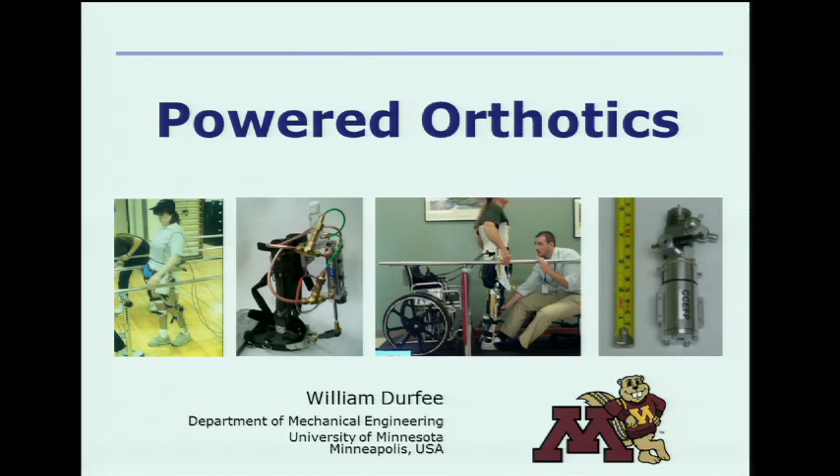Thanks, Ron, and thanks for inviting me. It's terrific to be back in Cleveland and to catch up with old friends and to meet new friends. It's been about 8 or 9 years since I've visited the facilities here in the Cleveland area, and it's always such a refreshing and invigorating opportunity for me to learn where you folks are at. So I always come out of these meetings here in Cleveland feeling newly refreshed. I'm looking forward to both showing you a little bit about some of the things I'm doing this morning and to meeting some of you later in the day.

The University of Minnesota is, I think Ron was telling me, compared to Case Western Reserve, there's something like 5,000 or 6,000 undergraduates there. That would be a small drop in the bucket for us. We're the fourth largest university in the country with a large number of students.

One of the interesting things about the University of Minnesota, which is terrific for designers like myself, is that we have so many disciplines, and so the possibilities of collaboration are really quite exciting.

Quite exciting there. We have kind of the sweet spot, like this place, where the engineering school and the medical schools are co-located, and as you know, that physical proximity is critical for substantive collaboration between fields.

And then the other part that is exciting about the Minnesota area is our MedTech industry, which is core to the state of Minnesota. So within the campus, within 50 miles of the campus, there are about 450 MedTech companies, including large ones like Medtronic, the largest MedTech company in the world, and small, tiny startups too. Our core areas are cardiovascular, and then our second core area is neuro, among the big and small companies. So it's a pretty exciting place to do MedTech.

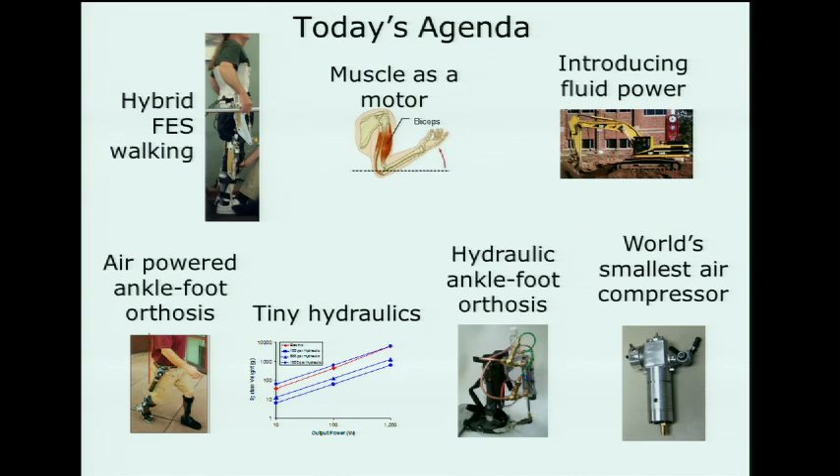So I'm going to talk today a little bit about hybrid FES walking, talk about muscles, and then spend predominantly time talking about fluid power. As we get there, I'll explain why I'm pretty excited about fluid power, including an air-powered AFO. I'll try to give you some background on fluid power on a human scale with tiny hydraulics, a bit on a hydraulic ankle-foot orthosis, and then some tiny power supplies. That's kind of where we're headed over the next 45 minutes or so.

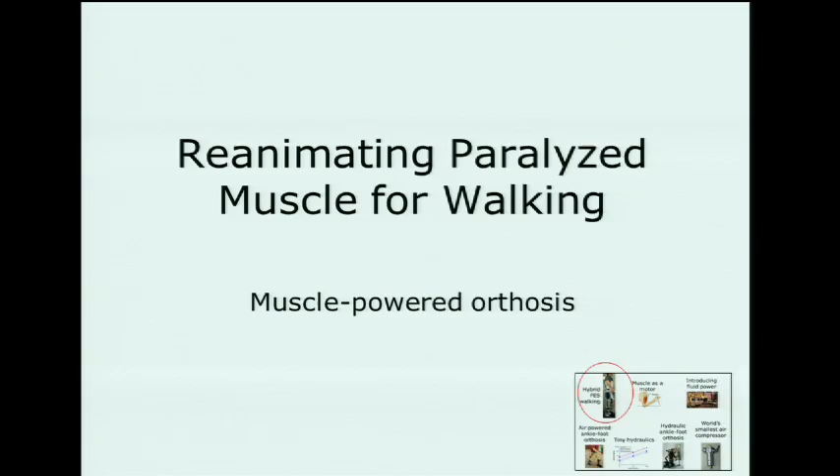So muscle-powered orthoses—even though this may be an area that you're most interested in, I'm just going to skim over this, since it's hard to come up with anything new and different from what's going on here at Case. But I think the approaches that we have for this might be a little bit different.

We've been working for quite some time in hybrid systems that combine orthotics and electrical stimulation for walking. One reason we are sticking to hybrid systems is that we only do surface electrical stimulation. So think about these walking systems more like an exercise machine that might be periodically used than a permanent assistive device. Once you say it's going to be surface stimulation, you're immediately at a disadvantage because you do not have good access to the suite of muscles you want, and because of the additional equipment that goes along with it.

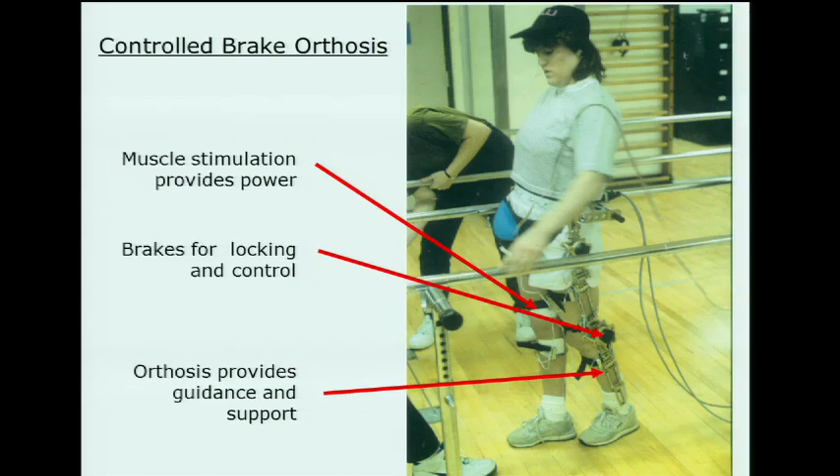Here's one version we worked on some time ago that has controllable friction brakes at the joints. The idea is you have an exoskeleton where you can lock and unlock the joints for body weight support, but at the same time control swing phase trajectory by manipulating the friction brakes—kind of like the speed of a bicycle going downhill, where gravity pushes you and you manipulate the handbrakes. Here, we turn on the muscles that drive the limbs, then regulate the limbs during swing phase by regulating the friction brakes. This is what that looks like in terms of gait.

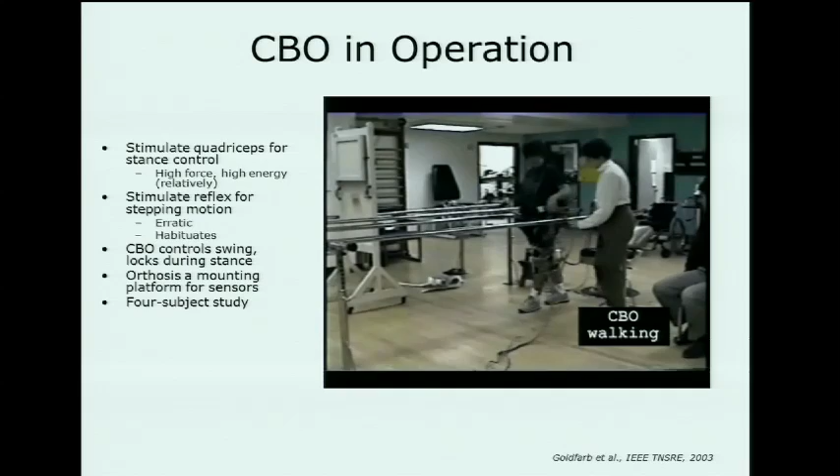What's interesting about this is the smooth knee extension, which comes about because of regulating the brake. The same subject, using a regular FES system without the brace, tends to have a very snappy knee extension, but here we can do a fairly good job of controlling the knee extension.

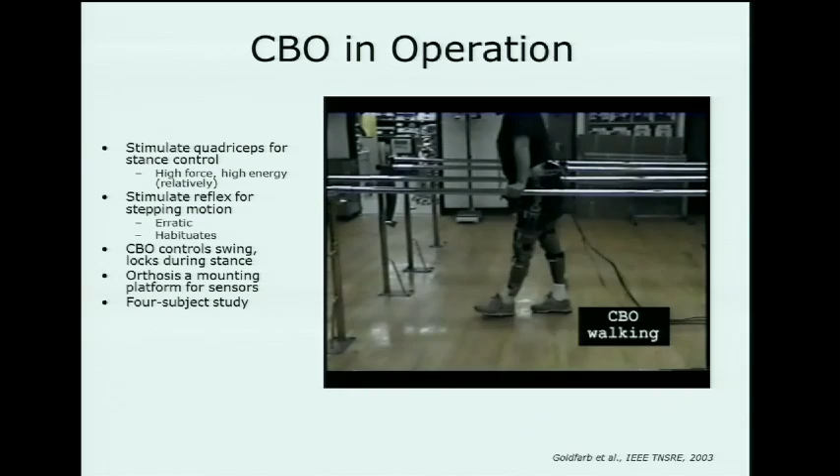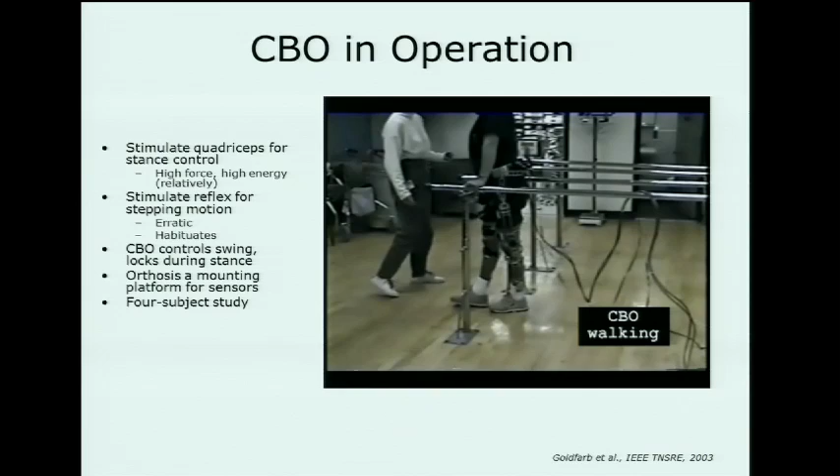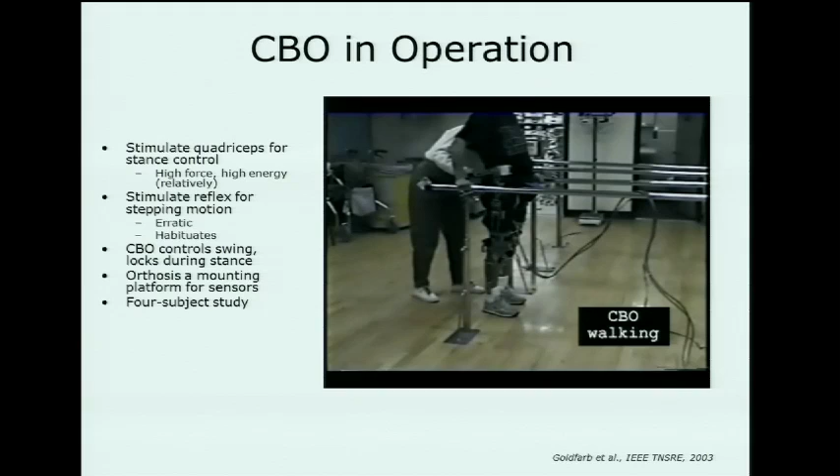Now these systems are the traditional Ljubljana-style approach, where the flexion is done with a reflex response, triggered through the peroneal nerve. That has its problems—it works on some people but can accommodate over time, and for others it doesn't work at all. It's highly variable. As a consequence, we're now looking at new systems that basically do not rely on the muscles to provide the flexion.

Then with the stimulation of the quadriceps, the knee extends, storing energy in the springs about the knee, but then also storing energy in a bolus of compressed air with a small pneumatic cylinder. Then later in the cycle, you can release that bolus of compressed air up to the hip to extend the hip, and thereby getting hip extension and storing energy in the hip springs, and then you can release the knee and the hip and get flexion at the hip and the knee.

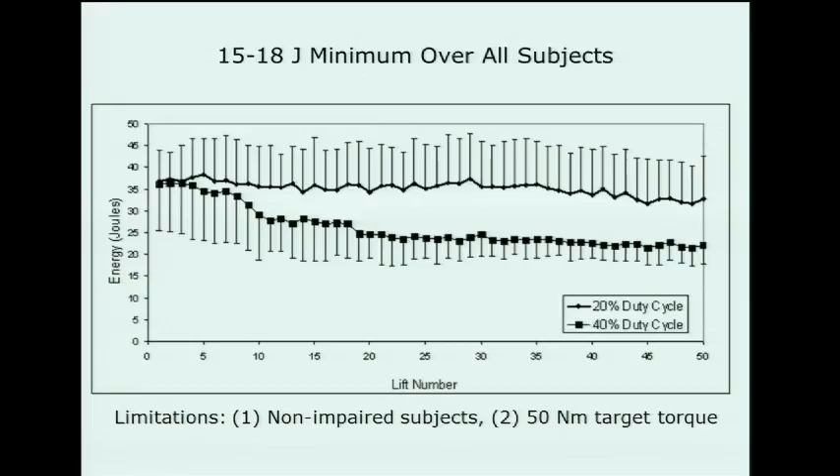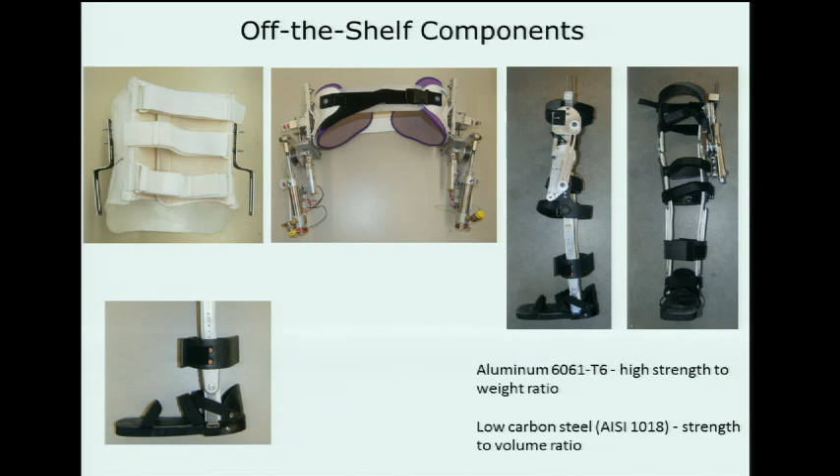Then building up our system, we pretty much build it up around off-the-shelf components for convenient mounting solutions. A couple of the technical details that I think are kind of interesting. One is these elastic storage elements. It turns out that if you want to store elastic energy, stretch energy, and you look across all available materials, you can do no better than rubber bands for storage per weight. So if you want to make a light spring, do not make it out of steel. Do not make it out of carbon composites. Make it out of natural latex rubber.

Then the other interesting component, and I think you use some of them in the technology around here, are wrap spring brakes in order to hold the system upright. So for standing, certainly, and for slow walking, there's a considerable period of time when the knees are in an extended and locked position. And so it doesn't make a whole lot of sense to have either electrical energy or muscle energy providing that anti-collapse support. So this is where wrap spring brakes are pretty interesting technology because they are extremely light for a strong holding torque. So if you want something that locks, that can withstand a lot of torque and is lightweight, it's hard to beat them.

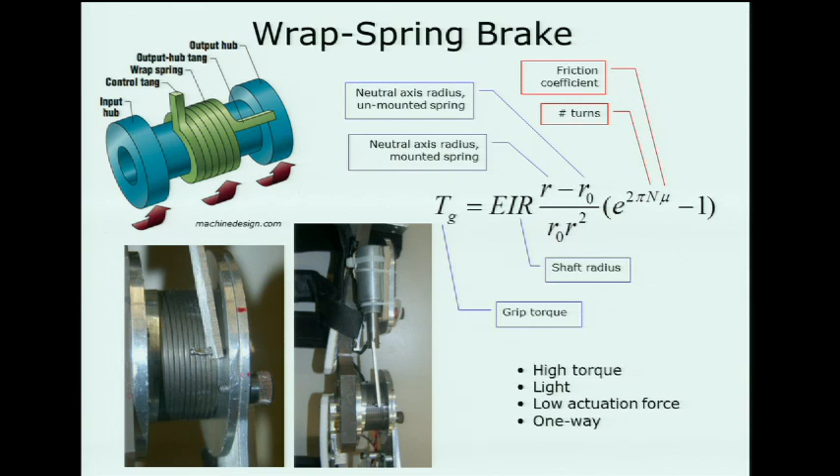Can these fail when accidentally lubricating them? So if you notice the friction coefficient mu is up there in the exponent, where things are very sensitive. So if you happen to be squirting WD-40 in them, then it's going to be much more slippery for sure. Yep.

This is a small study where we're doing two subjects, and what we learned from the first subject, who you see here, is that the original concept of using the knees to drive the whole system turns out to be not the way to go, but not for the reason that we thought. We did all kinds of dynamic studies and very careful engineering calculations, but it turns out that the flaw in this system is something very subtle that can escape engineers, but that perhaps physical therapists would know instantly, and that has to do with the alignment of the orthosis to the user.

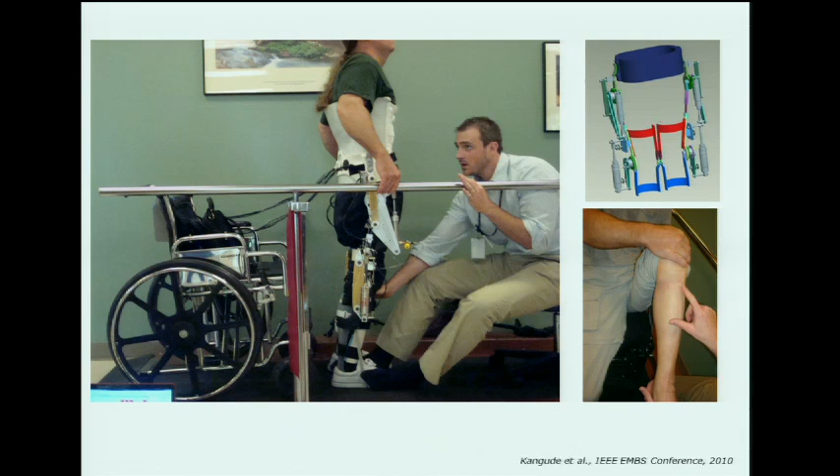And it turns out that the way this system is configured, here's the piston on the knee. You need to displace that piston the whole way in order to store all the energy that you need to store. And it's quite sensitive to what's going on at the end, because with pneumatics, if you're storing energy in a compressed gas, it's that last little bit where you get most of the energy.

And so it turns out that if you're just a little bit off in the alignment of the orthosis to the user, or if your orthosis structure flexes just a little bit, then you are not able to capture all the energy that your very careful mathematical equations said you were going to capture.

Yep, sure. Let me go back. So the question is, how's the knee influencing the hip? So it goes back to here. So the knee piston during extension is compressing and storing gas in a little tiny accumulator, and then there's a valve that releases that compressed gas into the hip. So store it in a tank.

You feed the hip one. So you compress the air by extending the knee, and then you release that compressed air into the hip one. So it's almost like a little pump to some extent.

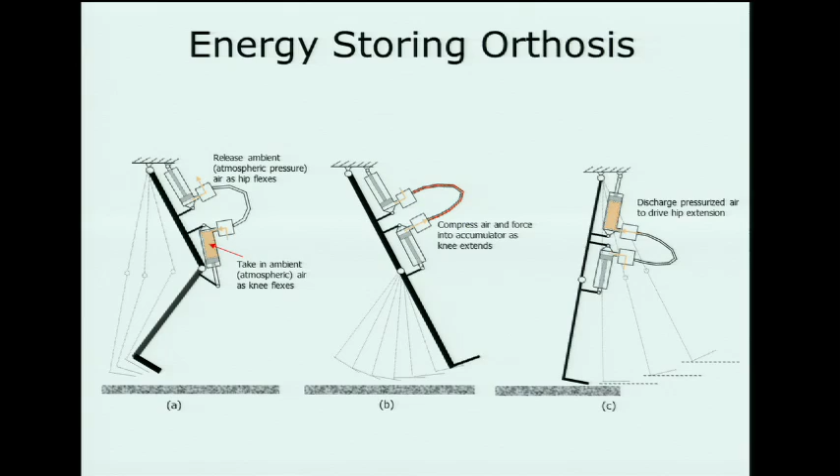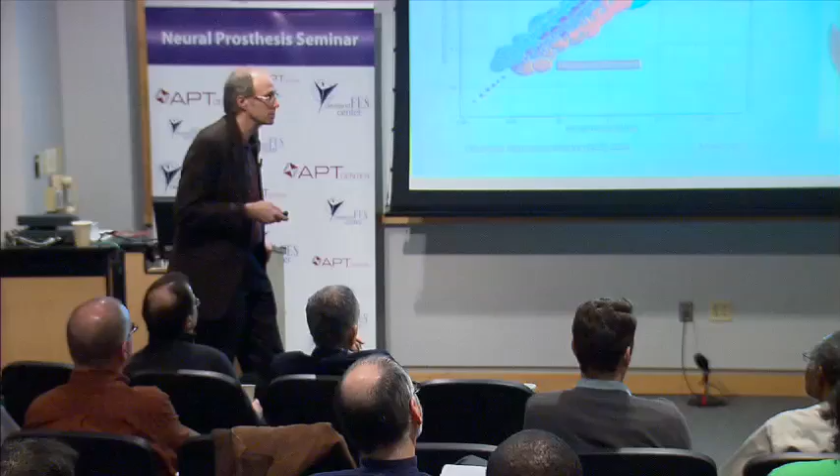Yes. Does it drive flexion too? So it drives the flexion and extension? No, flexion is done purely by the rubber band, so the elastic storage elements. Yep. And the reason for that, of course, is again with surface stimulation, activating hip flexion or knee flexion is problematic. So therefore, you have to look towards other solutions.

So the current solution and what we're doing is to use a tank of compressed CO2 to drive hip extension. Turns out you don't need a lot of energy to drive hip extension, and so the added weight of a compressed gas, or you could do it with a battery electric motor system, is going to be reasonable compared to the weight of the overall orthosis.

If you're using it to drive knee flexion or knee extension, then you're talking about significant amounts of energy, but you don't need a lot of energy to drive the hip. So same system, but rather than the energy storage and the elastic elements, now it's a tank of compressed gas that is driving the hip.

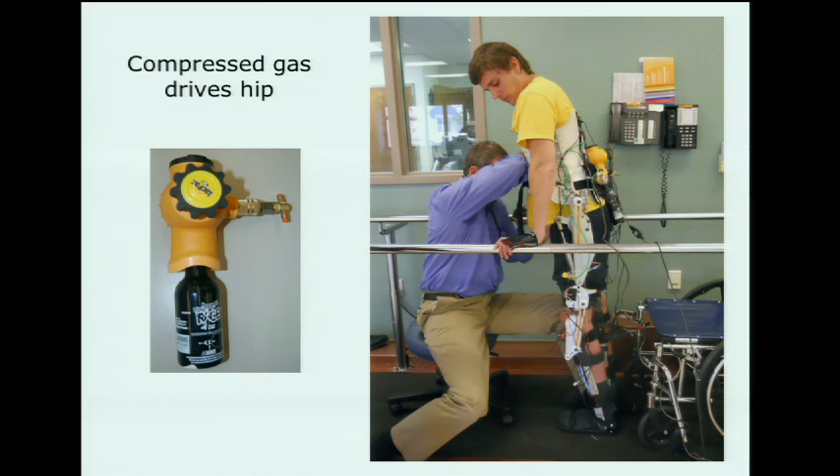So what I thought I'd do is to show you kind of behind the scenes a little bit, which I can do with this audience. We're just starting on this second subject now, but just what one of the typical initial sessions looks like with Brian, our physical therapist, and Joe, our subject, and you can compare and see if these look like the first sessions that you have here with first subjects that have never stood before. So I'll just play about a minute of this.

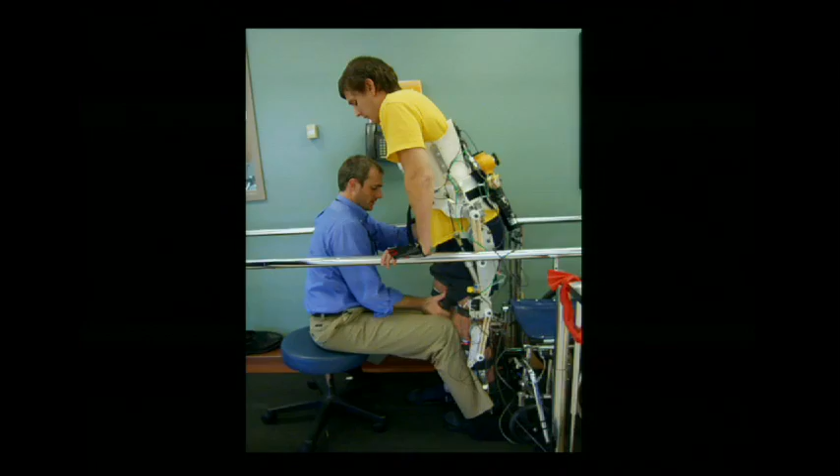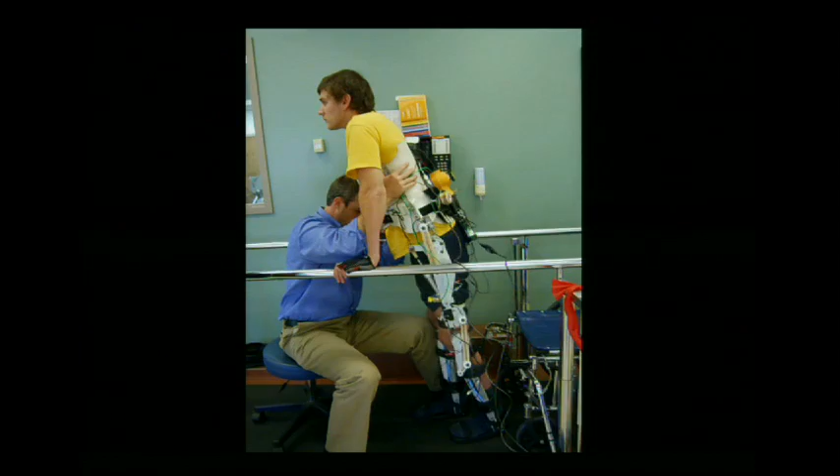I don't feel like the knee unlocked. Joe, you fine? Yep. Okay. Can we go left now? Yeah. So in 3, 2, 1, go. I think I should increase the stimulation. Yep, that's fine. You think whatever stimulation we did is good enough, or? For the quads, you mean? You could do more. Yeah.

They're coming in quite a bit later though. So like the hips break, the knee breaks. He starts going. Are you fine standing? Yeah. Sorry, I'm just saying he feels like the release happens, and then I'm not putting him on the ground, I'm waiting for the stim. Okay. And I think that's what Joe's feeling, he's hanging out bent, and then the stim kicks in, because there's a ramp up time. It takes 2 seconds.

So anyways, that's just to show you that the same kind of things go on in FES centers around the world in terms of dealing with people. There's so many things around. You design all the systems, it all works out on paper, and then when you actually get them on actual people, it's sort of a different story.

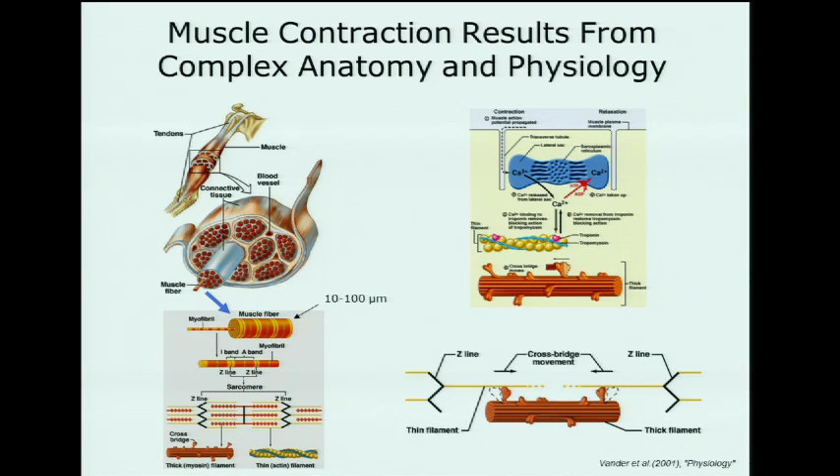All right, so let's shift over and look at non-muscle powered orthoses, starting off from a system level view of muscles as motors. They're very, very interesting motors, and they're a huge part of your body, a very substantial part of your body weight. Internally, very complex molecular kinetics lead to muscle contraction. But looking at it from a systems view, there's a number of parameters about muscles that you need to think about if you're going to replace them with non-muscles.

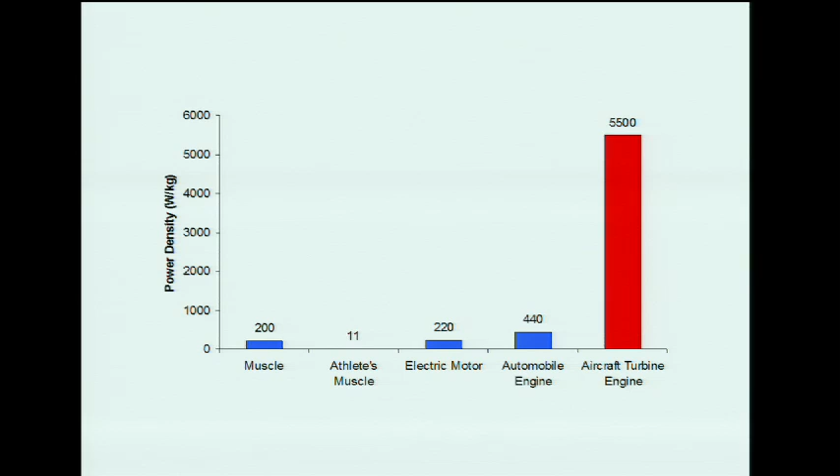So one of the things is that they actually are not particularly wonderful in terms of power density. They're about the same as your electric motor in terms of power density, and they're really lousy compared to an aircraft turbine engine. In fact, it's still quite remarkable that birds can fly using muscles. And in terms of their key characteristics, they're about 25% efficient.

The things that make muscle pretty interesting are the extensive infrastructure, that is the capillary system that's providing energy and taking away heat, and the neural control system. And because of that extensive infrastructure, that's where you get that exquisite control that is so challenging to replace with any artificial means, and probably is almost unobtainable. Muscle fatigues, but not just like a battery fatiguing; it fatigues in very complex ways.

The last three, I think, are probably the most challenging for thinking about any replacement by artificial means, and actually those last three are a big part of why users just aren't particularly interested in wearing orthotics a lot, and that's the fact that muscles are clean, cool, and quiet.

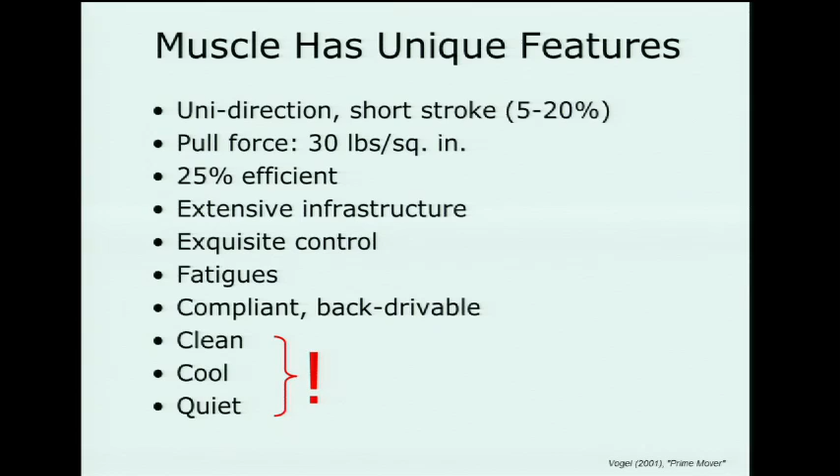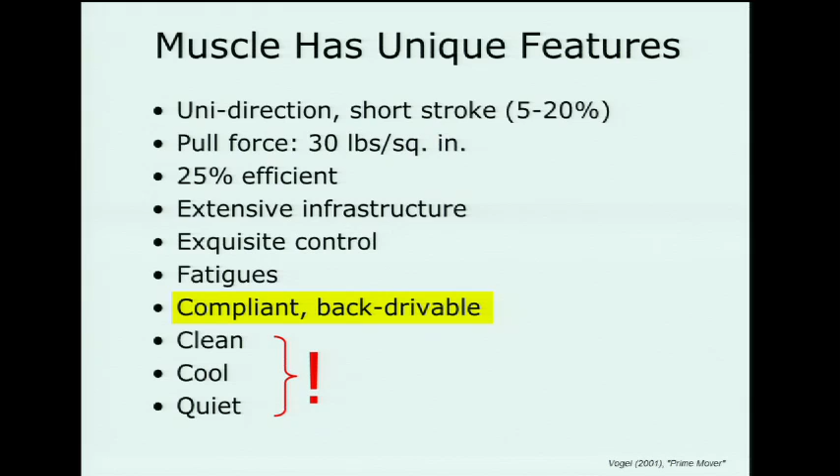And then the last one that I wanted to highlight, which is really intriguing, and I'll get back to this a little bit later, is the fact that muscles can be floppy. And so if you're talking about systems to replace muscle, especially orthotics, having them be floppy the way muscles are, as well as being able to drive the system, is extremely, extremely challenging.

Okay, so let's talk a little bit about fluid power, because I want to, by the end, hopefully convince you that fluid power is a viable option for creating non-muscle powered orthotics.

All right, so there's two main reasons why fluid power is viable. One is that it's small. So here's a hydraulic pump driven by an electric motor, and there's the electric motor, and there's the hydraulic pump. Same wattage, same power. So hydraulic stuff is small compared to electric stuff. So that's one thing I want you to take away.

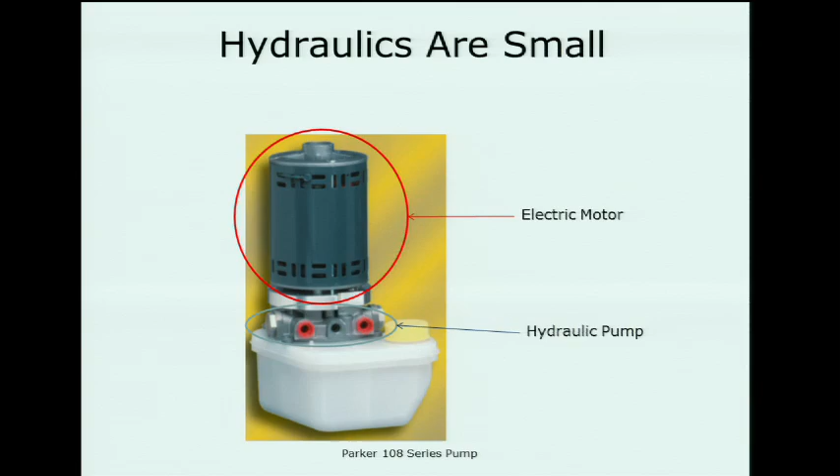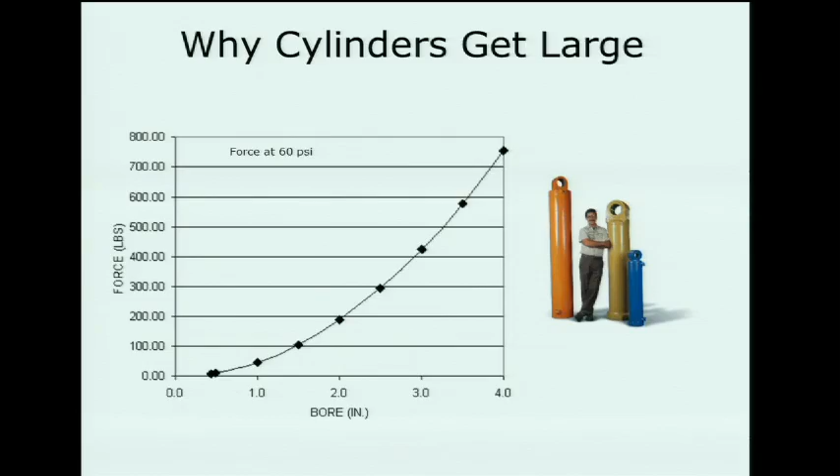The very, very simple mathematics. Force depends upon the pressure and the area, and that drives you to big diameters because the forces go up as the diameter squared. So on the one hand, you want to go to big diameter. But for human scale things, you don't want those big diameters, so you have to take advantage of the other side of the force equation, which is to drive the pressure up. The one message I want to leave you with is that using hydraulics only makes sense if you operate them at high pressures.

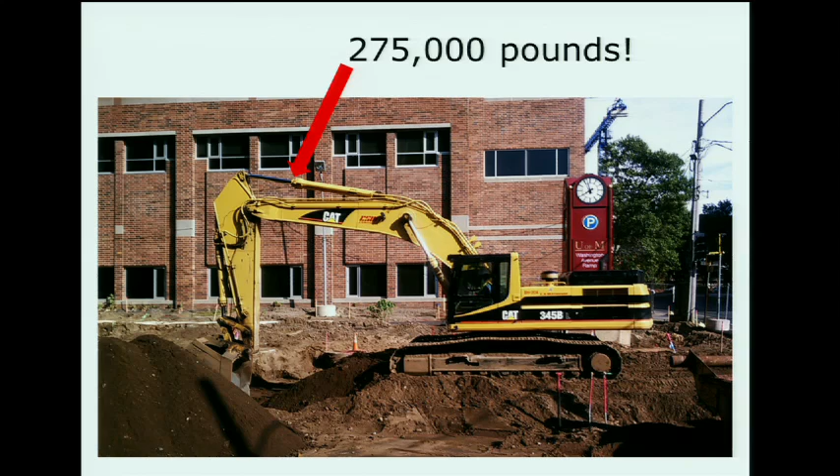So if you think about wearable orthotics and you want actuators out at the end, you want to have very lightweight actuators.

But at the same time, hydraulics are capable of exquisite control. I don't know if you've ever carefully watched what goes on in excavators, but they'll have construction workers down in the hole there, and this thing with 275,000 pounds is within a half an inch of their head. So good control is possible with hydraulics.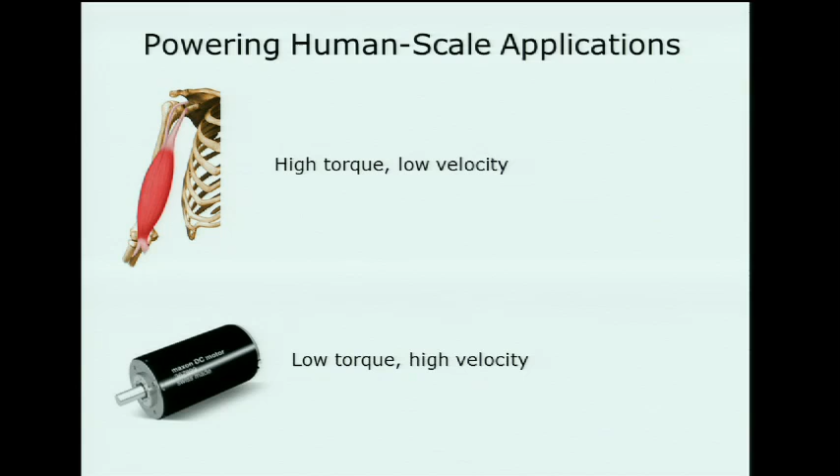When you think about human scale applications, we are high torque, low velocity machines. And electric motors are low torque, high velocity machines. So they are the complete opposite of where we are, which means that if you go electric, you need some kind of transmission, a gearhead, something to have electric motors drive your orthotics. And that transmission needs to be co-located unless you want to go with some complex cable-operated system that is going to be problematic for multi-axis orthotics.

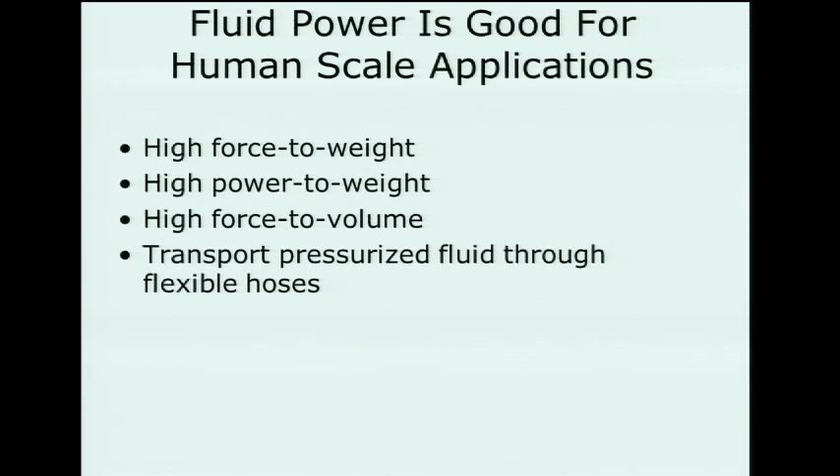Whereas hydraulics are inherently high-force, low-velocity actuators, so they are a nice match to human muscle, either hydraulics or pneumatics. So fluid power is good for human scale applications because of very high force to weight, very high force to volume, and you can transport the pressurized fluid through flexible hoses. But it's bad because as you go down to small sizes, the systems become inefficient with drag losses through the hoses and drops across orifices.

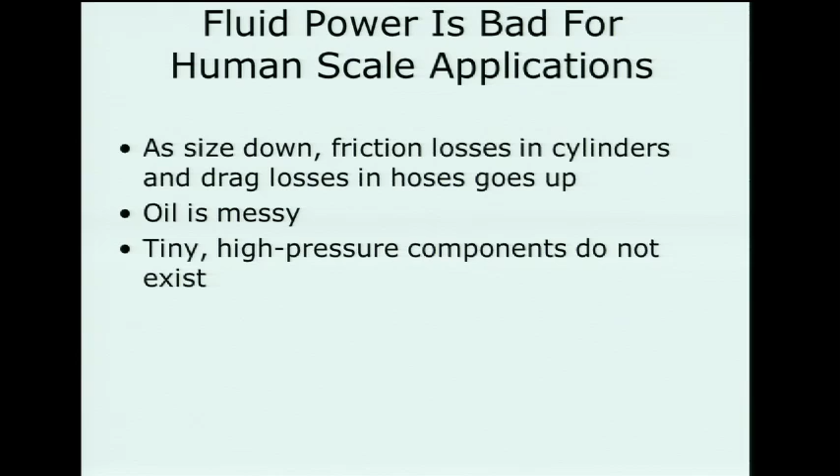Nobody wants an orthosis that's going to be dripping oil on the ground. That's a category killer. And you can't buy the kinds of things that you need off the shelf, unlike in the electric motor system, so it makes a little bit of a challenge.

All right, so replacing muscle with fluid power, it's about the power supply, it's about the actuators, it's about the packaging, and it's about the control. I'm going to talk a little bit about the power supply and packaging actuators, and not about the control. I think the control is sort of far off there—it's a solvable problem, but not a rate-limiting step at this point in the development.

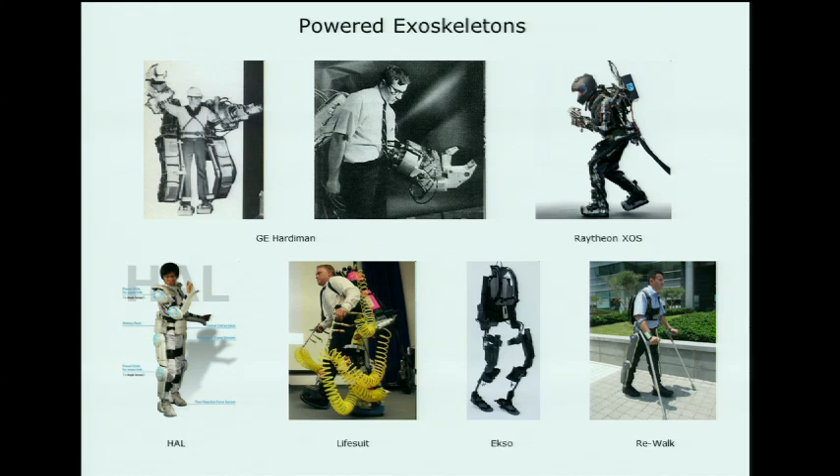So there are, of course, lots of non-muscle powered orthotics out there, some fluid power, some not, and as you know, there's been a wonderful rash of electric motor powered walking systems for lower legs, and I don't know if you're doing clinical trials with any of these now. So I think what I say is that there's plenty of precedent out there for non-muscle powered walking orthotics, and plenty of precedent for their acceptance in the user community.

The work I'm going to talk about is part of a center that is a 7-university consortium headquartered at the University of Minnesota in fluid power, where we're looking at fluid power across the whole scale of weight and power, from wind power machines down to micromedical devices. The part of the center that intrigues me and where I'm involved is down here on the human scale, which is in the area of 10 to 100 watts. So 10 to 100 watts in terms of an assistance machine would be quite a remarkable addition to your normal power.

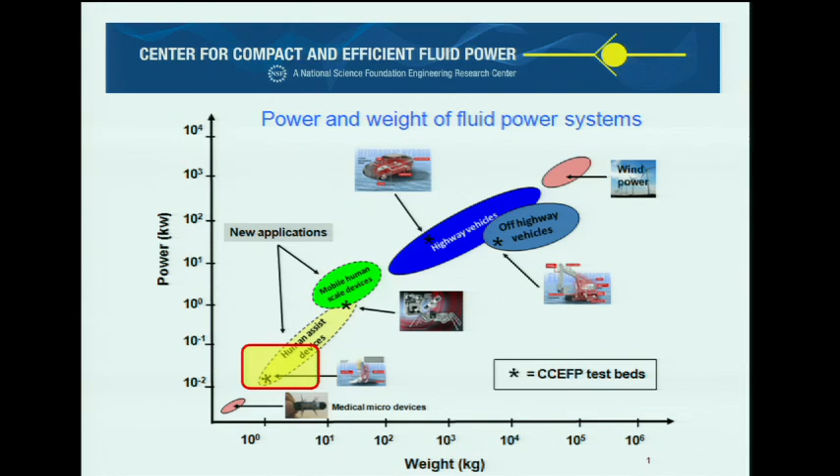So when you're walking, you're expending maybe 100 watts. Athletes are up at 300 watts. So an additional 100 watts is quite a remarkable amount of power to add to a human system.

We're working on ankle foot orthotics as a test bed for exploring tiny fluid power. The reason is that the lower limb is cyclic compared to the upper limb, which is non-cyclic, so that makes things easier because you know what the lower limb is doing. The ankle is particularly intriguing because it's got a reasonable range of motion and torque, about 70 Newton meters, and very stringent packaging applications. You have to be honest about size and weight. And the power is interesting too: your ankle is about 13 watts on average, but peaks to 200 watts.

That makes it intriguing for thinking about fluid power systems using concepts like hydraulic launch assist, where you store energy in an accumulator and release it rapidly, the same way roller coasters are launched with hydraulic launch assist. With fluid power, you can get very high power density, meaning you release power quickly, which is an intriguing match to what's happening at the ankle, giving you that little burst right at toe off. For those reasons, that's the joint we've chosen for a test bed to explore tiny fluid power. Here's an example of a pneumatic foot orthosis.

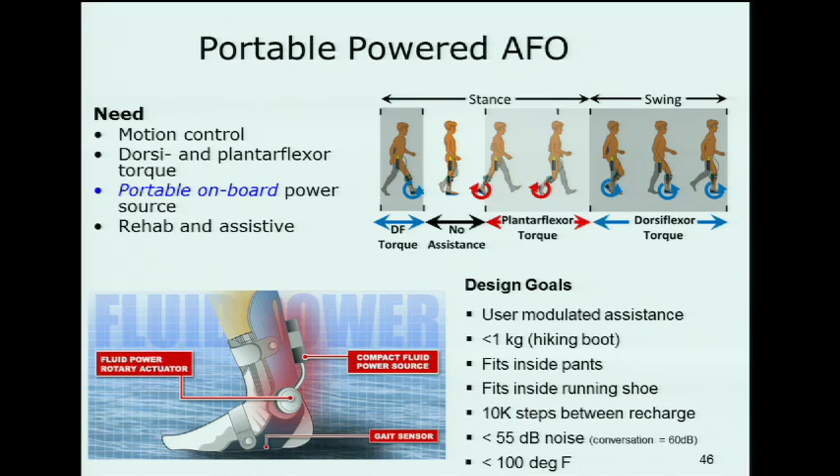Those are the far-reach design goals, and I'll tell you now, trying to think if we've hit any of those goals yet—we have not hit any of those goals yet. Just truth in advertising here.

Here's what that ankle-foot orthosis looks like in use on an individual with plantar flexor impairment. This particular one is driven by a bottle of compressed CO2 that gives about 2,000 steps. What you can see here is the ankle power, and this is the normal toe-off push, that normal plantar flexion push. This particular individual had essentially no plantar flexion push, and the active ankle orthosis did restore that. As far as we know, this is one of the few, if not the only, untethered powered active pneumatic ankle orthosis out there. There are plenty that are tethered, but being untethered turns out to be more challenging.

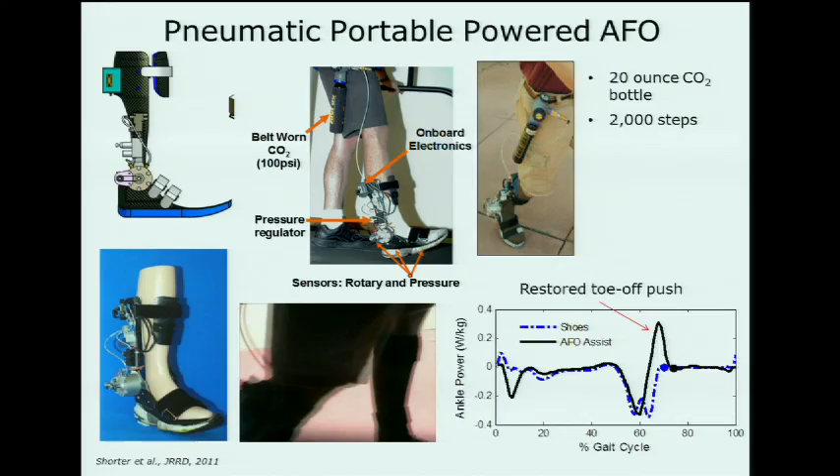Does that run into a problem when you're actively using it with the CO2 cooling your actuators—do you have to heat your actuators? The question is whether the CO2 expansion cools the actuators. The answer is it doesn't impact it that way, but it does lead to inefficiencies with that expansion. The actuators are pretty robust to the temperatures that come out, but you do lose energy with that cooling.

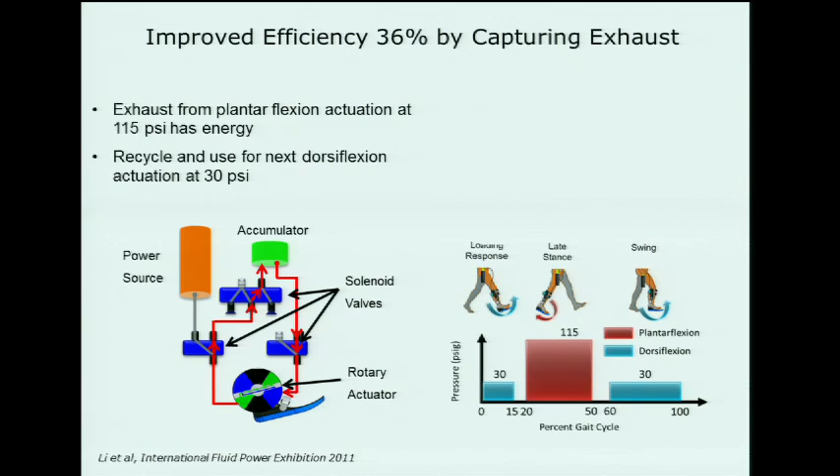There are a number of smart design choices you can make with this. For example, because the plantar flexion torque—the toe-off one—is so much higher than the dorsiflexion torque, you can use the exhaust gas from your plantar flexion to drive your dorsiflexion and save a considerable amount of energy. Other versions of this that Dr. Hsiao-Wecksler and her team were working on did energy capture: at heel strike, you can compress small bladders and use that captured energy to actuate your ankle-foot orthosis.

The next version of that, right now we're using commercial air motors, and actually this one is SMC. We were talking earlier, the current version uses an air motor from Parker. They make some pretty good small air motors for a local company, but we're moving towards a custom one built by our colleagues at Milwaukee School of Engineering that can better optimize the torque levels we need for the ankle and integrate the various valves, silencers, and other components needed in the fluid power system. So the one on the right is a mock-up, but that should be approaching reality about June of this year.

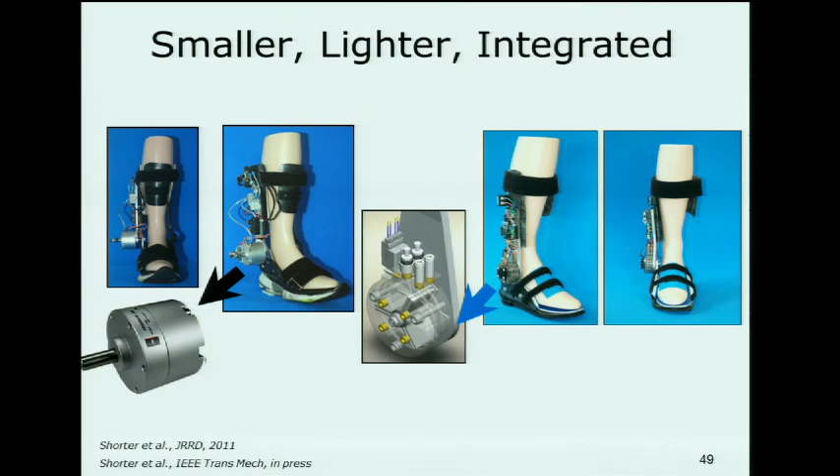All right, let's take a look at tiny hydraulics now compared to pneumatics. So pneumatics has two issues. One is it's more challenging to bring up to very high pressures, and two, the fact that air is springy makes it more difficult to control because you've got this big spring sitting in your system.

With tiny hydraulics, there are two questions we're trying to answer. One, hydraulics is wonderful for big stuff—how small can you go, and do its advantages still hold for small stuff? Second, on a design question, when does it make sense to make these powered systems out of hydraulics compared to electromechanical? There's plenty of electromechanical orthotics out there—the iWalk foot ankle, various electric walking systems. So you have to have some advantage over that to make sense to go with hydraulics. What I hope to convince you is that if you drive your hydraulics to high pressure, it does make sense to use them, or potentially makes sense over electrics.

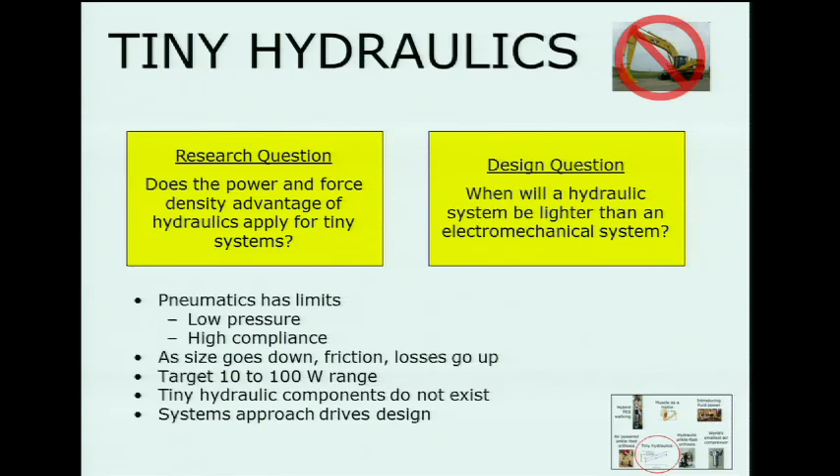So the way we did this was through a systems-level approach with a considerable amount of mathematical modeling of fluid power systems in order to predict their weight and efficiency. I want to give credit to Jicheng Xia, an absolutely wonderful PhD student who's been doing a lot of this work.

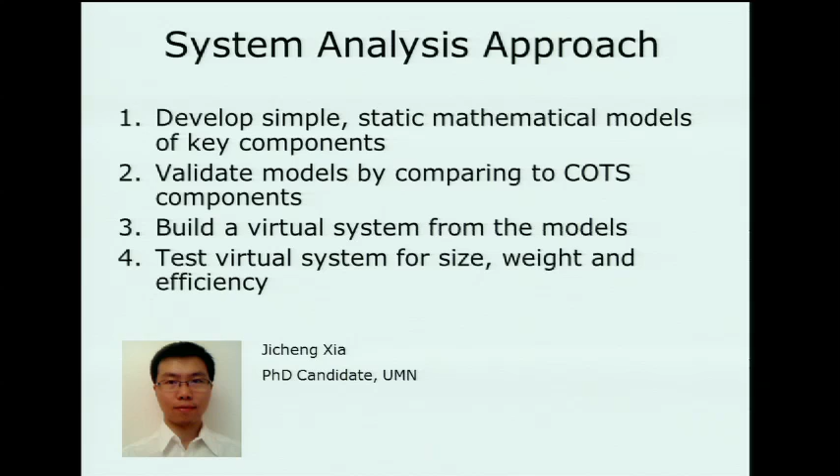You can model cylinders and ask, what's the weight of a cylinder? If you're going to run it at a certain pressure, it's got to have a certain wall thickness or else it's going to burst. Then if you look at the cylinder rod, if it's going to push a certain force, the rod has to be a particular thickness or else it's going to buckle when you push on it. So you can use fairly standard order-of-magnitude equations to get the fundamental mechanics behind these things.

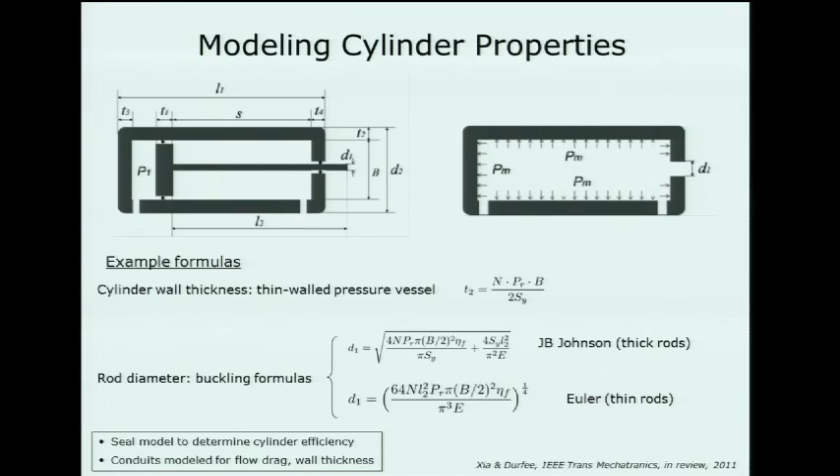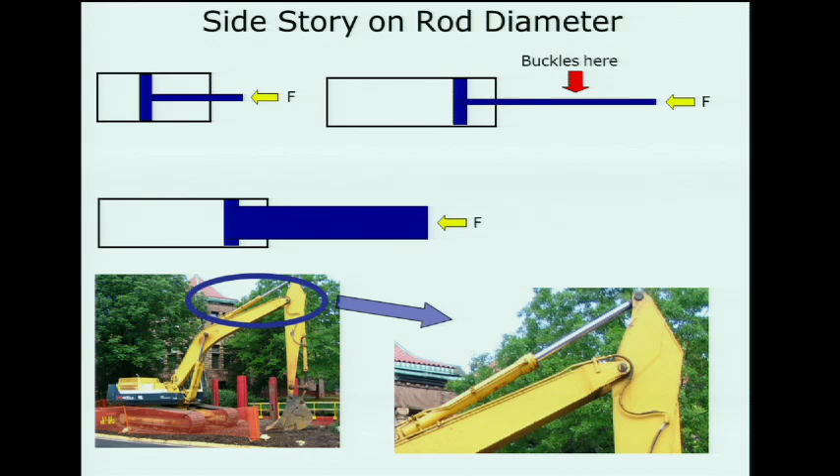It's kind of interesting—you wouldn't think it, but that rod coming out of the cylinder turns out to be a weak link, because you want fairly long strokes and very high forces, so you need a big thick rod. This is in fact what you see next time you look at an excavator—they're essentially rams where the rod diameter is about the same as the cylinder diameter, because they're almost one-way devices. But a one-way device like this means that when you pressurize the other side for retraction, you get almost no force whatsoever. So for things like the ankle where you do have differential torque, it might make sense, but it turns out to be a bit of a limit, which brings you back potentially to biomimicry solutions with things that are more tendon-like and single-acting cylinders. That's an area we're exploring.

So is this mathematical modeling just all theory? It turns out that we took catalog data from about 186 commercial cylinders, predicted what they should weigh, and compared it to what our mathematical model said they should weigh—and we're right on. So that says these equations do make sense. What's interesting about the expansion is it shows that the actual weight of smaller cylinders is heavier than they should be. That's because a real component has fittings that go along with it, and all the little things needed to screw the lines in and so on start to add more and more weight as you get down to smaller cylinders.

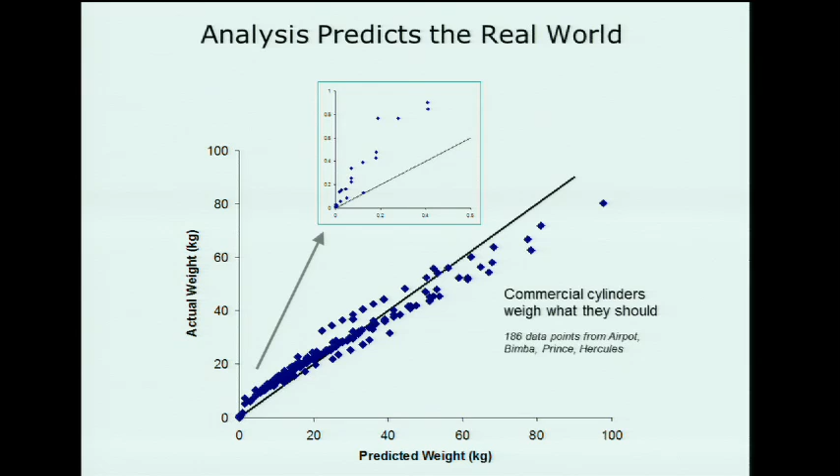What that says is there's opportunities for thinking of hydraulic systems not as single components that you bolt together, but rather as an integrated system. We'll talk a little bit more about that in a couple of minutes.

Then efficiencies - there's right here on the seals, two things can happen. Fluid can leak, and then you can get friction. So in one case, you lose volume, the fluid. The other case, you lose force because of the friction. So those become extremely important as your size gets small.

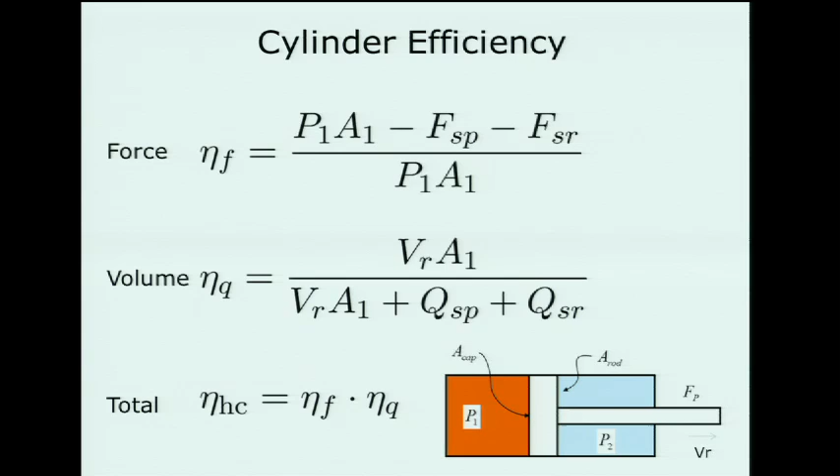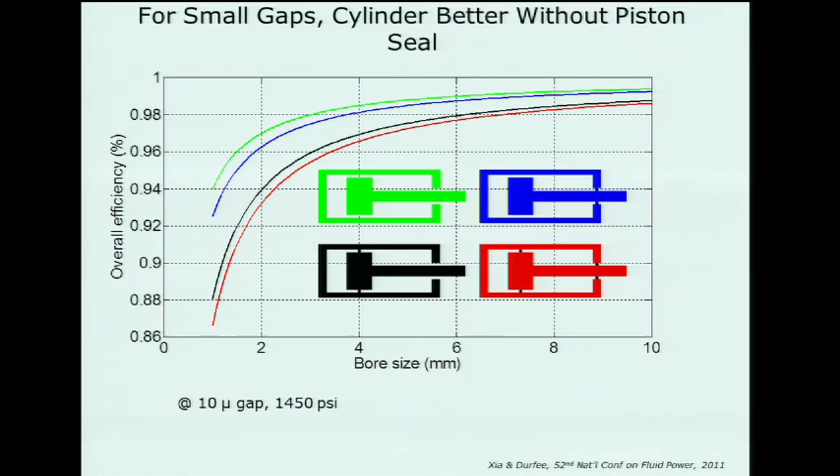The best case is that light green one, but you don't want that, because no seal off of the green one on the rod means that the oil is dripping out onto your leg. So that's probably not a case that you want to do. So as you start doing these scaling laws, these interesting things come out that are a little bit unexpected.

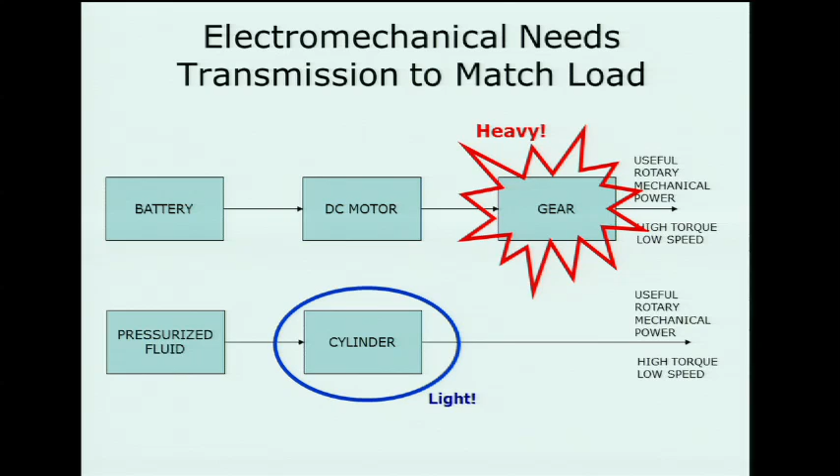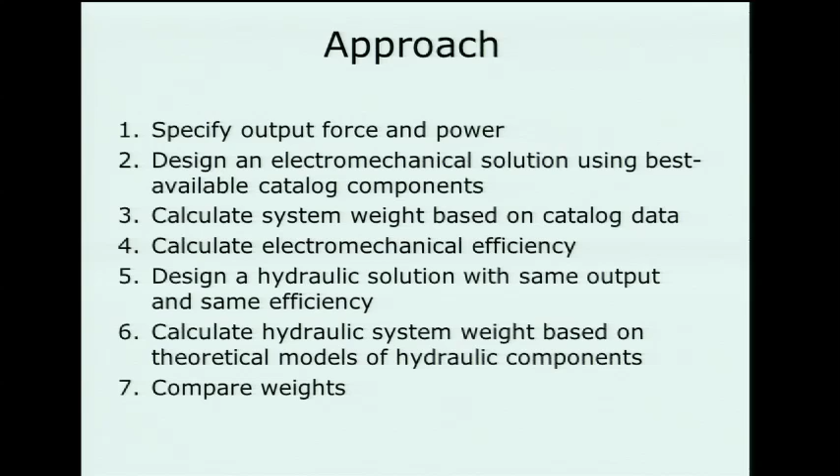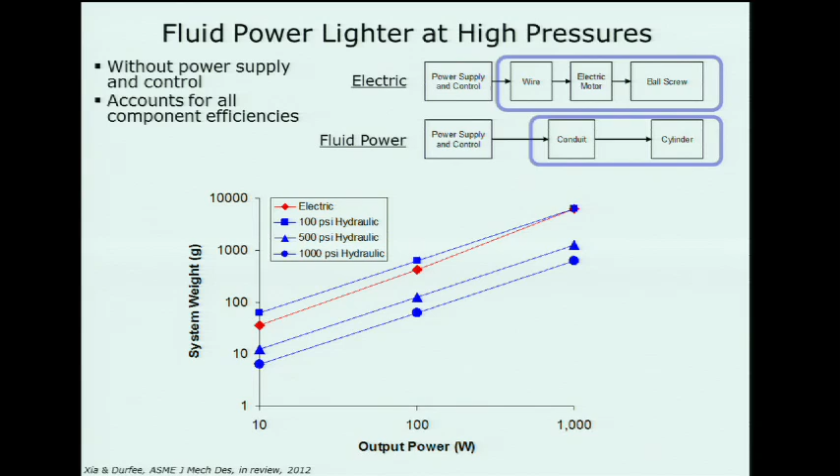But you can't ignore the power supply, and I'm going to talk a little bit about the power supply in a minute. So here's an early hydraulic AFO prototype where, for the power supply, we're going battery to electric motor to pump to conduit to cylinder.

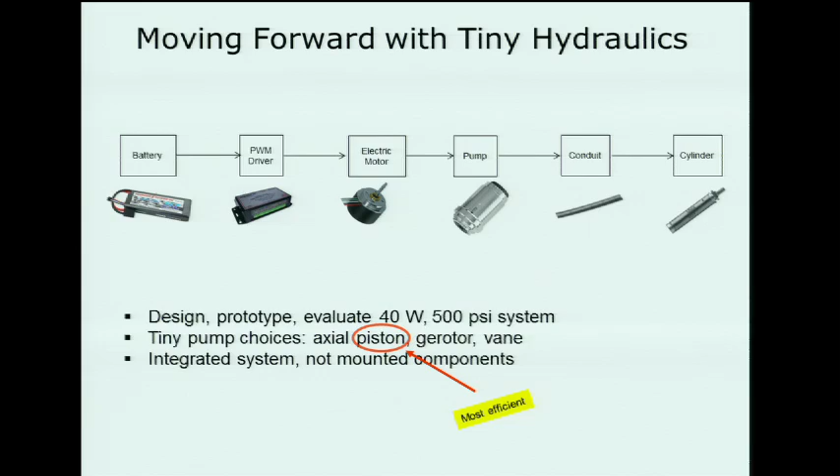So one of the things that this is telling you is that if you want an effective wearable system, you're going to have to come up with a solution that does not have those fittings and hoses.

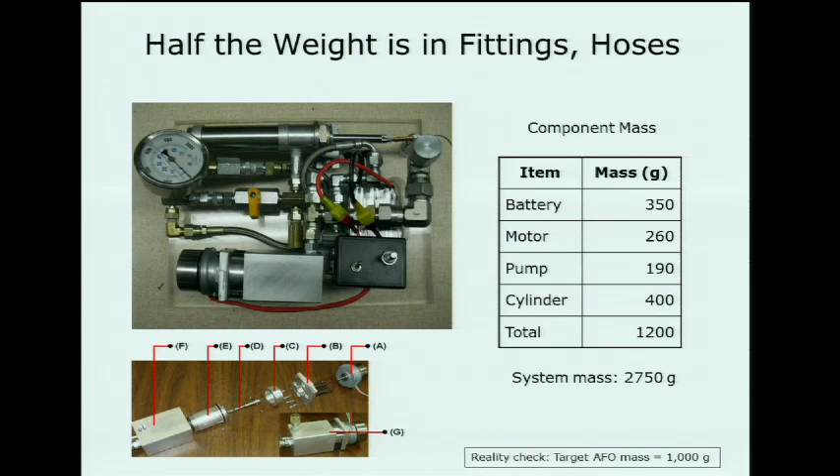Here's generation 1 of our ankle-foot orthosis, which is that same demo essentially reconfigured onto an ankle-foot orthosis. It can lift you up on your toes, so it's sufficiently strong to lift you up on the toes, but it cannot go the full velocity of gait, and as you can see, it's way off of our target weight. So the question is where to go from there.

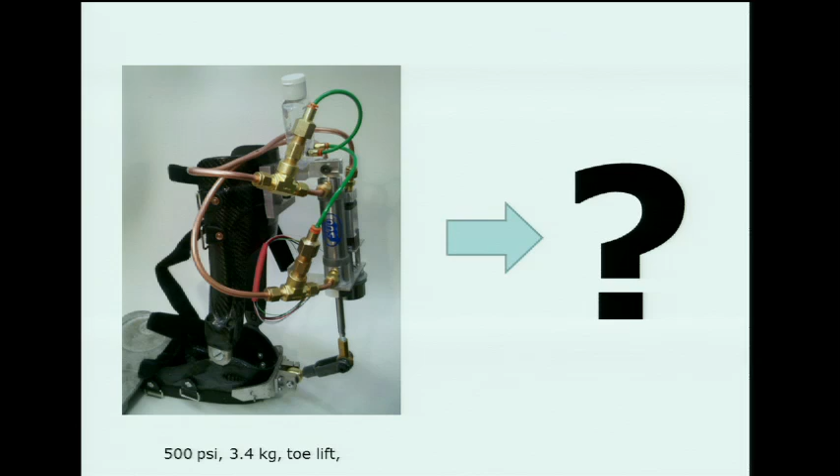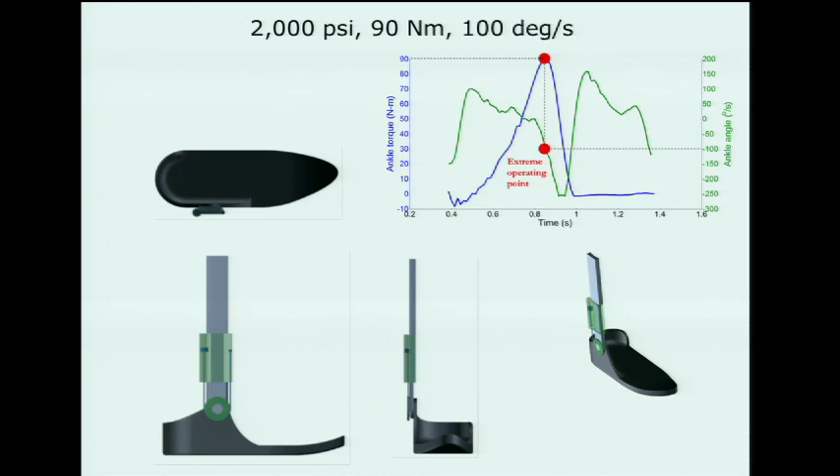Now we're where we are right at this instant, in February of 2012, and this is pretty much where we're going, where the diameters of these pistons are correct for giving you 100% of your ankle torque. This system will give you 90 Newton meters, which is where your ankle torque is, but it will not give you the full speed. On the top right, the green is your ankle speed, and for purposes of demonstration we are trading off speed to get that full torque. But what'll sit at the ankle should not look quite this good, but not that dissimilar to what you see here.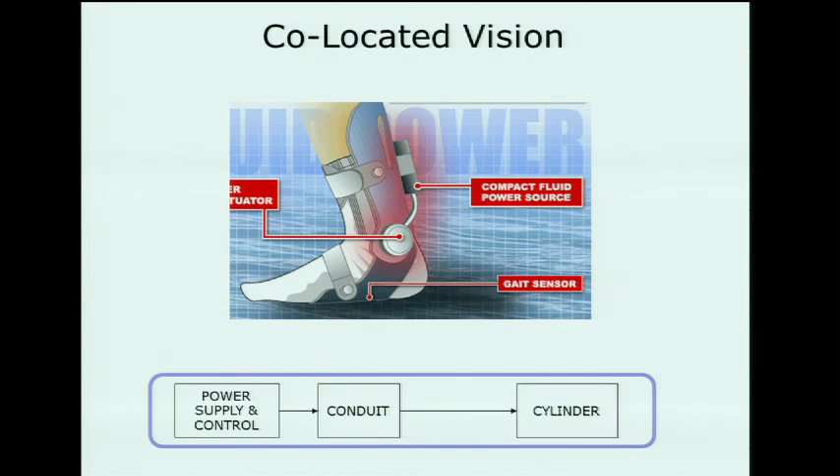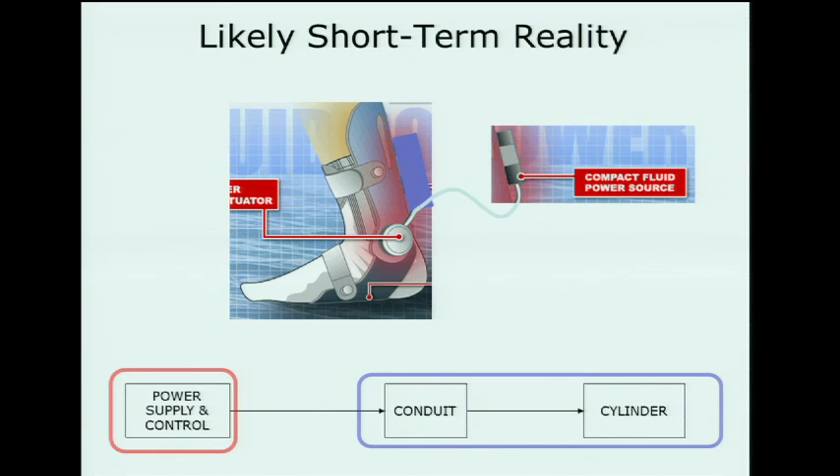And we do have this co-located vision — artist's renderings are wonderful, everybody's going to sit right there at the ankle. But we've come to the conclusion that the source of the pressurized fluid is going to, for the moment, not sit down at the ankle, because that would be too heavy. So that would have to be someplace else. There's a lot of things about that choice that we can talk about later.

Okay, so let me close out and go back to that pneumatic system and talk about how to get — you notice that tank of compressed CO2 gave you 2,000 steps. So how do you get to 10,000 steps, and what if you want to get rid of the battery? So let's get rid of the battery, and the way we're going to do that is to look at the energy density of power sources.

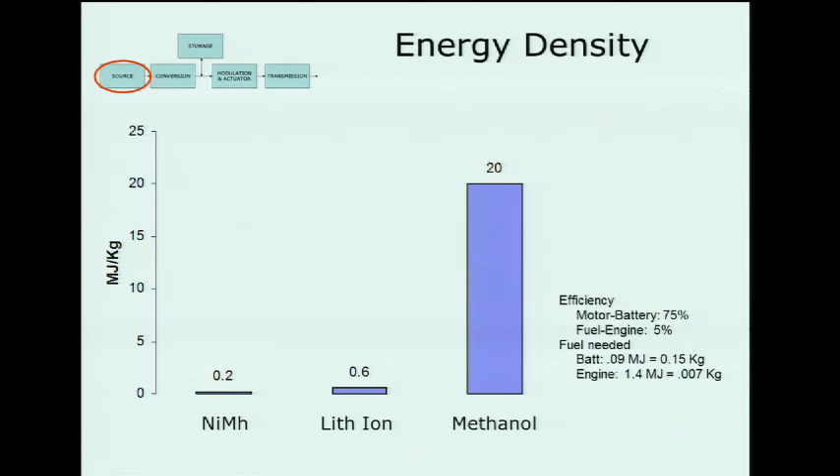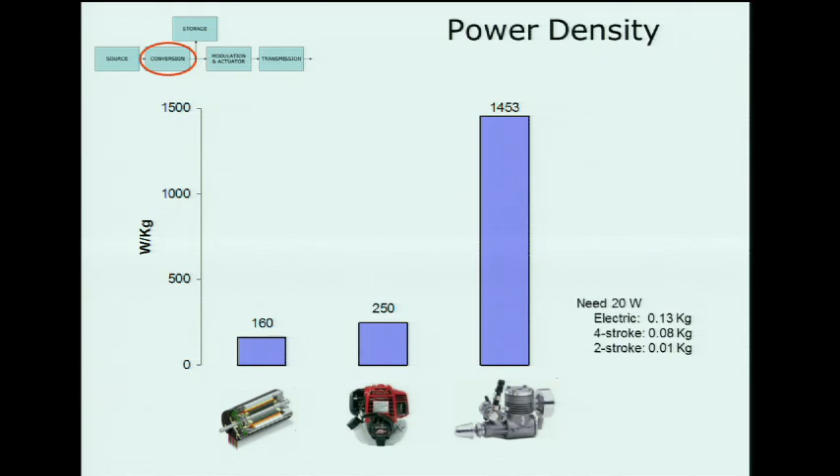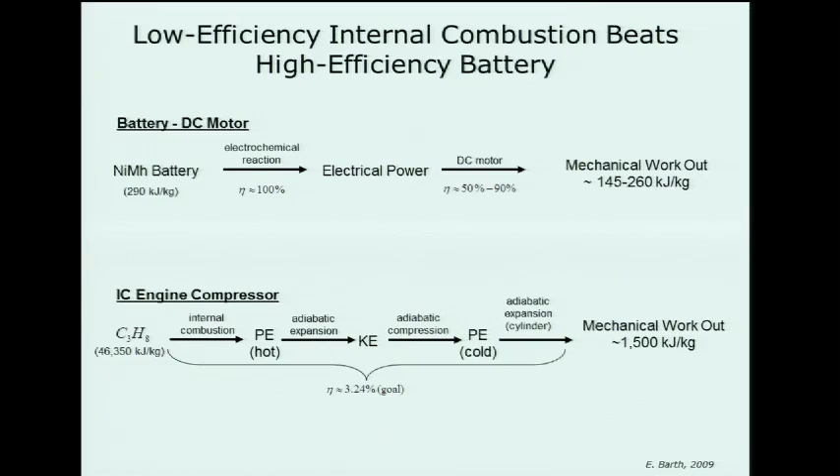If you look at going from hydrocarbon fuel to cold compressed air, if you can do this with 3% efficiency, you will do better than a battery through an electrochemical conversion to mechanical work output. So internal combustion engines — the efficiency process is not nearly as efficient as battery and electric motor, but because the energy density of what you start out with is so much higher, you can win on size and weight even if your conversion process is inefficient.

So here's what you want to do: you want to build a tiny air compressor. And here's a tiny air compressor that is a free piston configuration with HCCI combustion. I'll explain the latter in just a second, but let me walk you through this engine.

So up at the top, you have the combustion chamber. The fuel explodes here, drives this piston down. This piston, through a connecting rod, is connected to the compressor piston. So as this whole thing drives down, you compress air down here that goes off to a storage tank through a check valve. At the same time, you're pressing down against a spring, which rebounds it. The piston drives back up so that the new fuel-air mixture is squished, and it squishes until it explodes, and then drives it down again. So unlike a crankcase engine, this is a free piston engine.

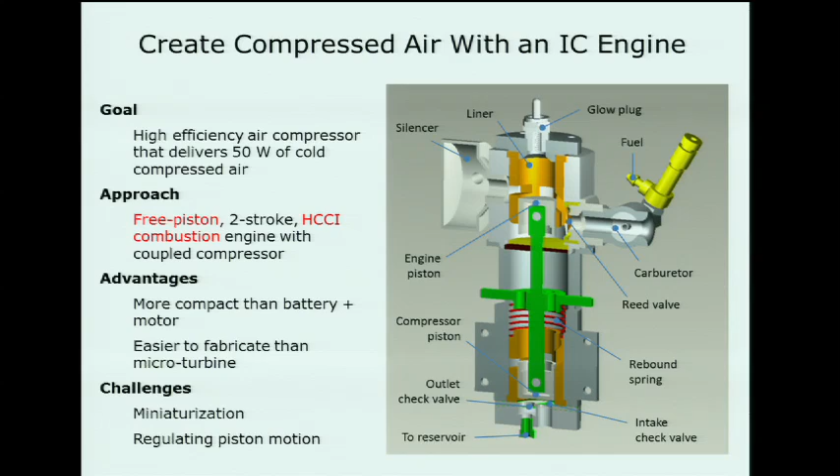But homogeneous charge compression ignition, you basically squish the fuel-air mixture till it explodes, and at some point it's going to explode. And it's got another advantage that because the explosion happens all at once, all of the fuel is burned. Unlike spark ignition, where you've got flame propagation, you're always left with a little unburned fuel. And this HCCI does work down to, some earlier work at the University of Minnesota showed that you can get combustion in a cylinder as small as 2 millimeters this way.

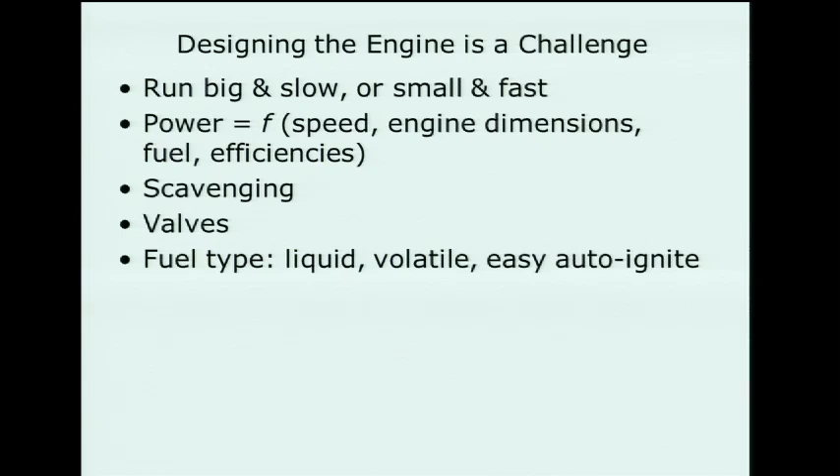So designing this engine is a challenge. You can either have a big engine running slowly to give you the power, or you can have a little engine going put, put, put, put very quickly to get the power. So we're going small and fast. But you've got to look at the engine dimensions, fuels, efficiency, the scavenging, the valves. There's a lot of details in designing this engine.

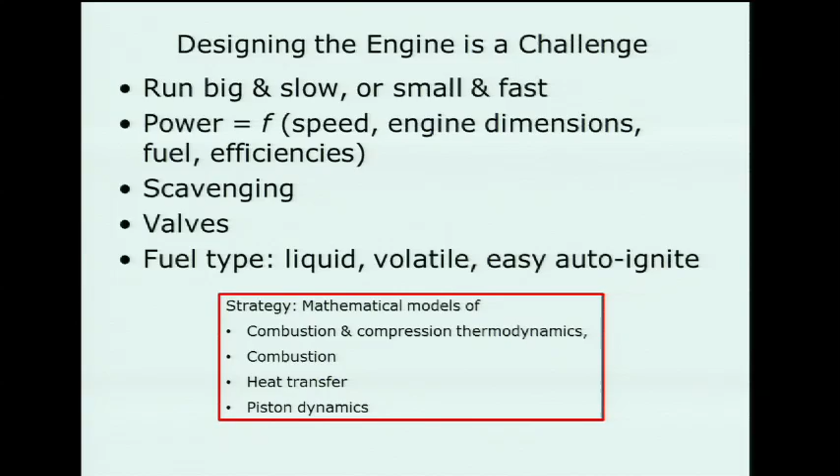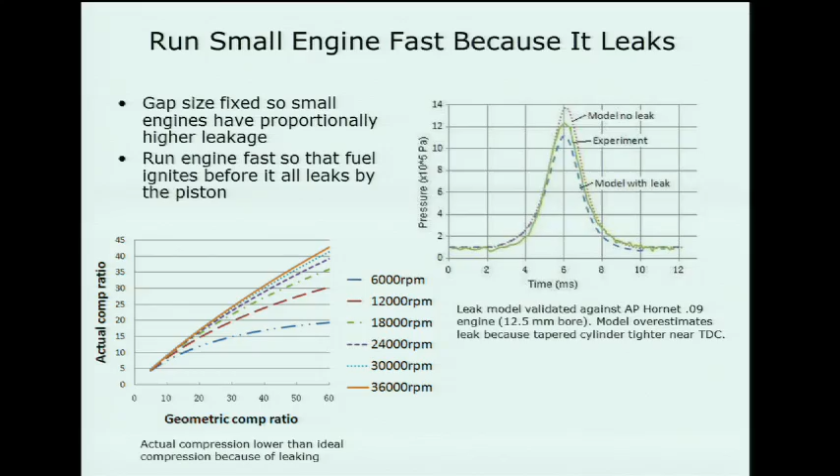So Lei Tian, the PhD student on this, working with my colleague Dave Kittelson, who's the engine expert. A lot of mathematical modeling, combustion, heat transfer, thermodynamics, piston dynamics. If you run the engine too fast, you don't give the fuel enough time to explode. So you compress it, but then it's going this way so fast it doesn't explode. You run it too slow, and then the fuel leaks by the cylinder. So you can't run it too fast, you can't run it too slow.

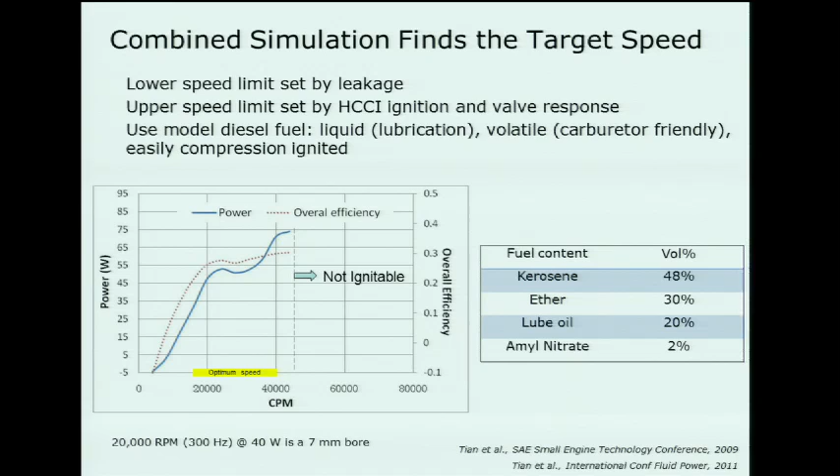I'll skip over a lot of these details. And again, it has to do with the type of fuel and fuels that can auto-ignite. But we've basically determined that about 300 hertz is the optimum speed for the 40-watt, more or less, engine that we're designing with essentially a kerosene fuel.

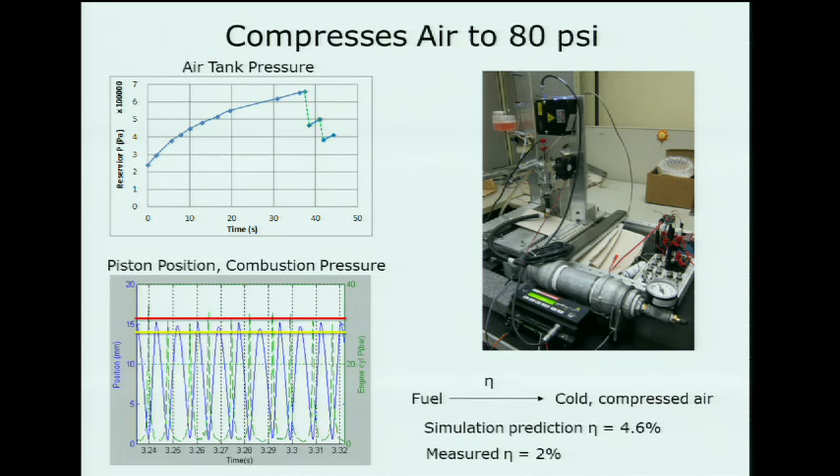So here's the prototype. It's about 5 inches long, and this, yes, noisy, smelly, hot. I'll explain that in just a minute. So this prototype, we're very excited because just about a month ago, it was actually able to compress air, which was very exciting, to 80 psi. We were predicting an efficiency of 5%. Our measured efficiency was about 2%, and that mostly has to do with the precision of the construction of the engine and the friction and leakage in the system.

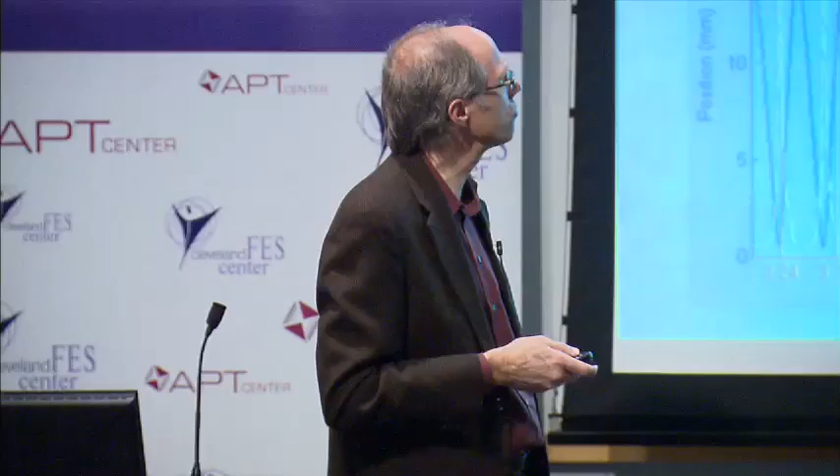Both solvable problems. But as far as we know, this is the world's smallest air compressor, which has maybe not applications to orthotics because of that noisy and smelly, perhaps in rehab, but not in daily use, but certainly has a lot of potential for things like handheld power tools.

All right, so challenges in tiny fluid power: fabrication, so component integration, minimizing size and weight, precision machining. If you're going to have a sealless gap, that gap has to be down around the order of 10 microns or so. So precision machining. High pressures, as we said, so you're operating at 2,000 psi. How do you do the seals? Low friction, zero leak. How do you keep it safe? How do you get that 2,000 psi fluid? And it really is all about the efficiency.

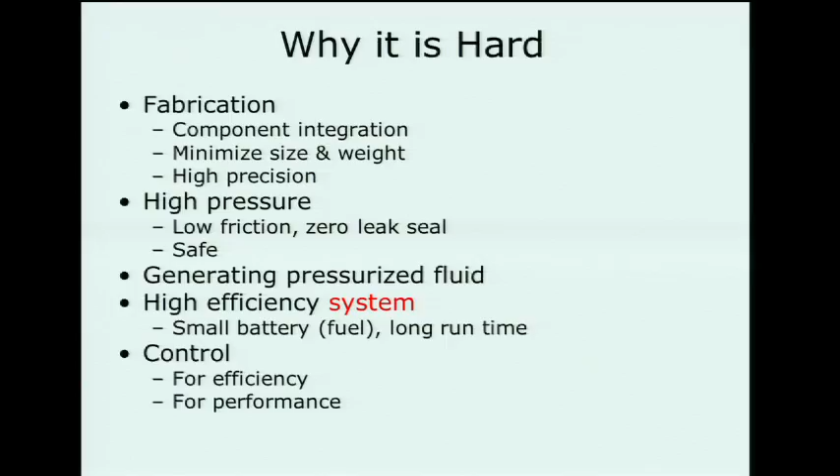All these things really devolve down to how heavy the battery or other energy source is that you want to carry around. So the actual efficiency, you can design a really tiny system. It won't be very efficient, and the consequence is that if you want to go 10,000 steps, you have a heavy battery. So kind of looking at all that from a systems level. And then controlling not only performance, but controlling so that if you really want to get your system to last 10,000 steps, you're controlling for efficiency.